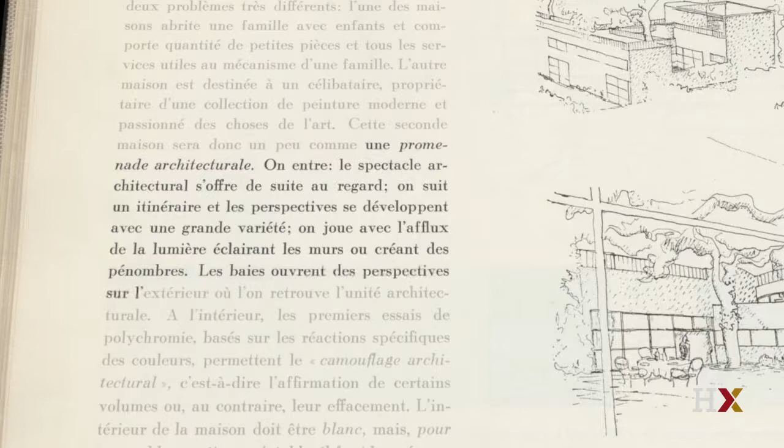You enter. The architectural spectacle at once offers itself to the eye. You follow an itinerary, and the perspectives develop with great variety, developing a play of light on the walls or making pools of shadow. Large windows open up views of the exterior, where the architectural unity is reasserted. Here, reborn for our modern eye, are historic architectural discoveries: the pilotis, the long windows, the roof garden, the glass facade.

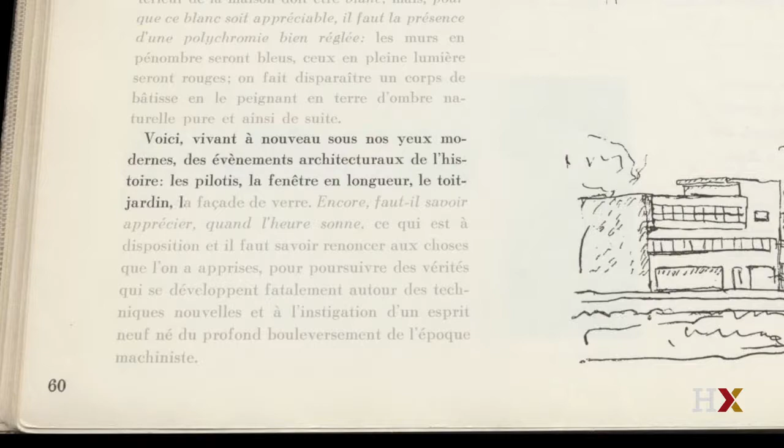Le Corbusier is describing the Villa Savoye at Poissy. While at the Villa La Roche, the spatial articulations of the interior were conceived in relation to an exterior that was still itself plastic and still could move around and be varied. Now at the Villa Savoye, the villa has become a total object through which the will of the epoch could be affirmed.

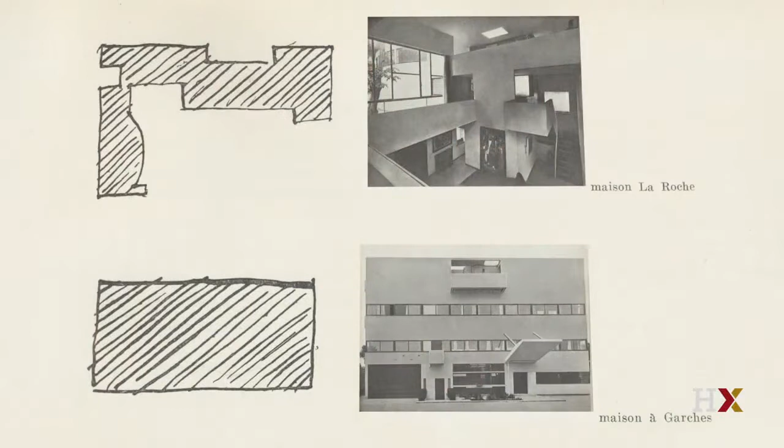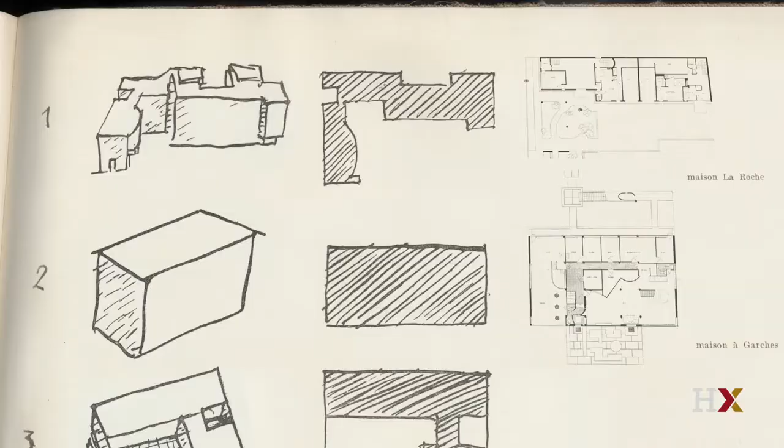The signs of purist composition that we saw in the prospects of frontality at La Roche and through the kind of energetic swirling at Garches here take on a more material consistency. At the same time, the prismatic envelope of Garches is reasserted to contain the equally variability of surfaces at La Roche. The architectural solutions of this elementary ribbon window of the enclosed terrace become a kind of insistence of this total object.

And at the same time, while we have this kind of functional minimalism of the interior, almost like railway sleeping cars, like ship cabins, like airplane cockpits, at the same time, there is an architectural solution that shows its real concern to be the relation of people to these new conditions.

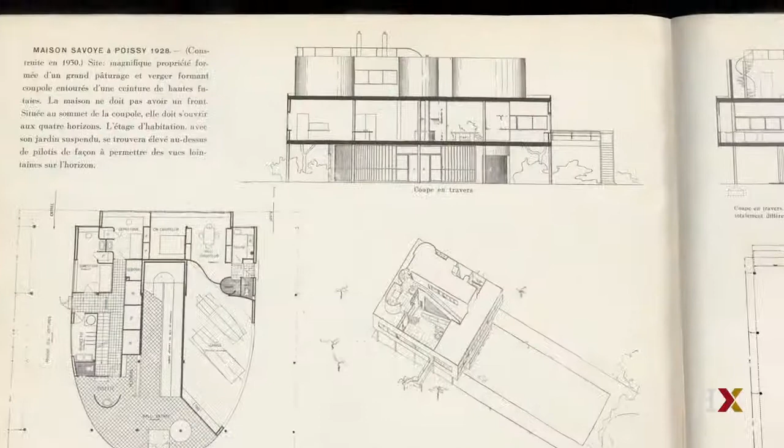The Villa Savoye is the epitome of the functional stratification of the section, of raising the pilotis, freeing the ground plane for movement, for transportation, for recreation, for vegetation. The house above is completely ordered and controlled, while the earth below is free and available for collective occupation, for collective use. And now, for the first time at the Villa Savoye, is a coupling of objets types, of which the Villa Savoye is only one.

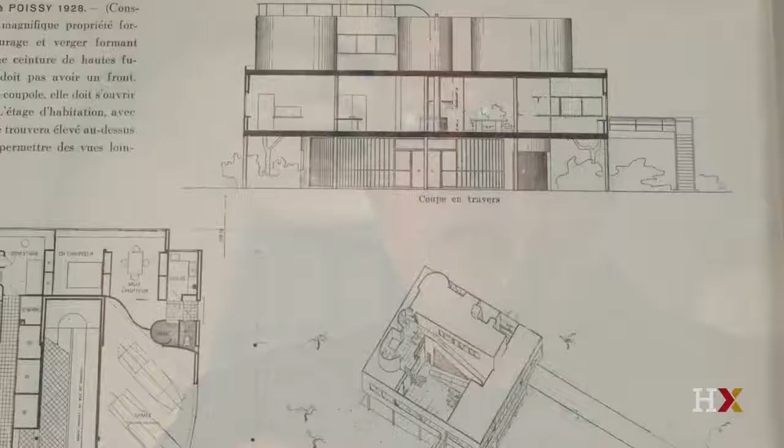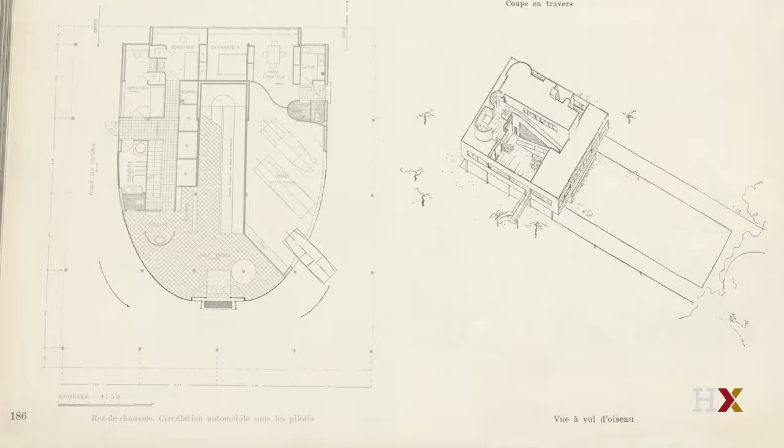For example, the automobile, itself a paradigm of the objet type, now comes into the site and moves under the building through the pilotis to interact spatially and functionally with the house itself. At the lower level, at the entrance level, the curved surface of the industrialized glass, which defines the volume of the entry hall, is itself determined by the turning radius of the automobile. Here, two object types come together and interact.

As you penetrate that glass wall and enter the entry hall, you see first, on the one side, a ramp that leads you up to the piano nobile, up to the main floor. Adjacent to the ramp is a sink assembled together with one of the pilotis, a very large industrial lamp, and a table attached to the pilotis. There's a kind of assemblage of objet type.

The sink itself is a mass-produced, highly refined, functional vessel for cleansing that stands almost like it's one of the objet type of his purist paintings. And the sink is juxtaposed, like in an assemblage, with this industrial lamp, which at first seems out of scale. It doesn't seem domestic at first, but it kind of gets domesticated in its assemblage by its interaction with the small table, with the pilotis, and with the sink.

But the combination of sink and ramp, as unusual as that is, it's not just two industrial types coming together. The place that you find the combination of sink and ramp is at the entry to a religious building, like a mosque or a synagogue or a church, where you first cleanse yourself and then enter slowly and ascend to a sacred space. The juxtaposition of these various object types creates a kind of metonymic relationship or an assemblage that makes connectivities that extend the domain of the house itself out into the industrial world.

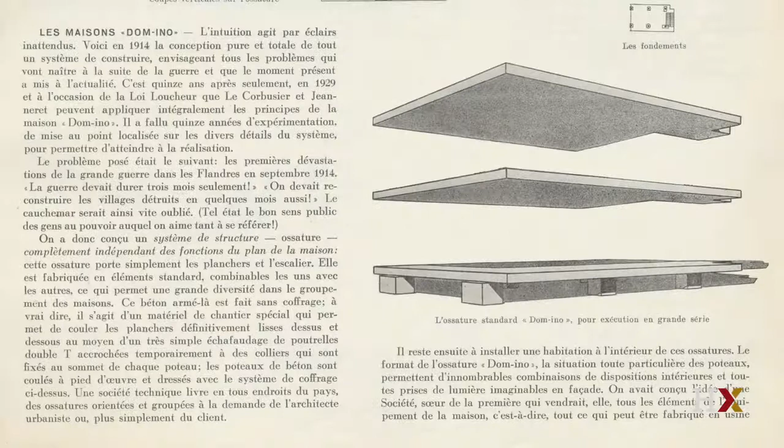The architectural promenade begins at the moment of stasis where the sink and the ramp have come together at the entry. Remember, the name architectural promenade is the name Le Corbusier gave to this itinerary of movement, rotation, and frontality through a building. In the case of the Savoye, the ramp becomes the instrument of that architectural promenade, and it operates in two ways. First of all, it operates as a path or as a space, a vertical space that cuts through the horizontal slabs. In the Dom-ino system, the horizontal slabs are determinate, and you move through those through a stairway or other circulations.

But the ramp cuts through those horizontal slabs and establishes a vertical slice of space that unites the slabs in a different way than the stair. Now, it is the case that even at the Villa Savoye, there's also a stair that provides a parallel but different kind of vertical circulation through the horizontal slabs.

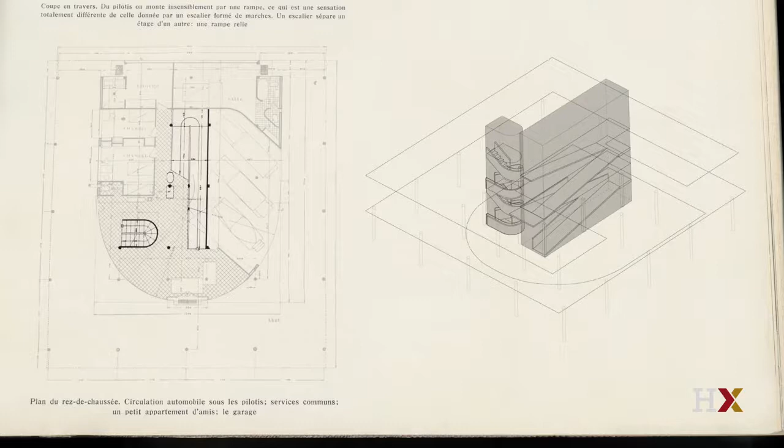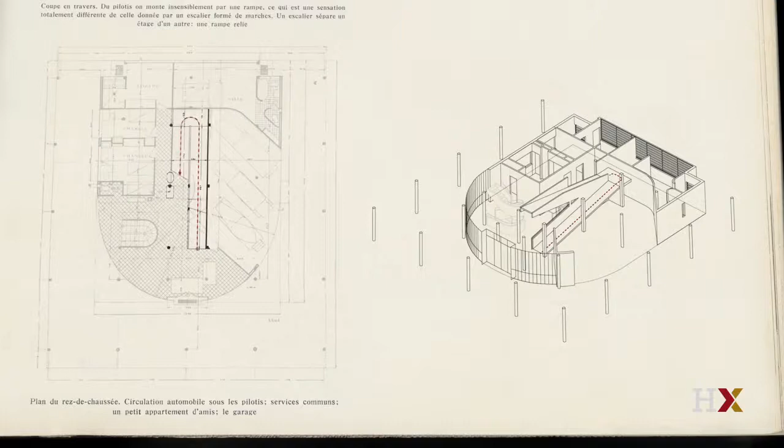And that combination of ramp and stair, they're actually very, very close to one another, and they connect with each other as you move through. That's also an important apparatus of the architectural promenade. So as you get on the ramp and go through and then turn around and come back still inside the house, but at the top of the second part of the ramp, you reach a moment where the stair has also come up and made a landing. So the ramp and the stair connect at that point.

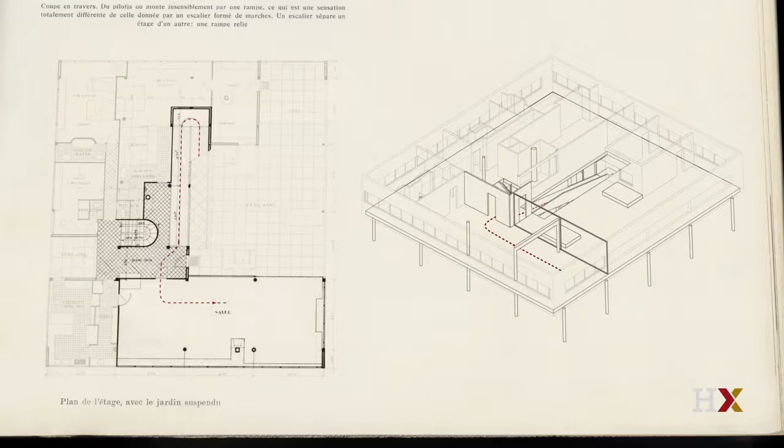At that landing, you have a choice. Either you go into the main living space of the house, or you move through the glass curtain wall outside into a very large terrace. That living space and the terrace interact in a very porous and transparent way. There's almost no distinction between the space of the living room and the space of the terrace. And indeed, in good weather, you could slide the glass doors open and it would become the same space.

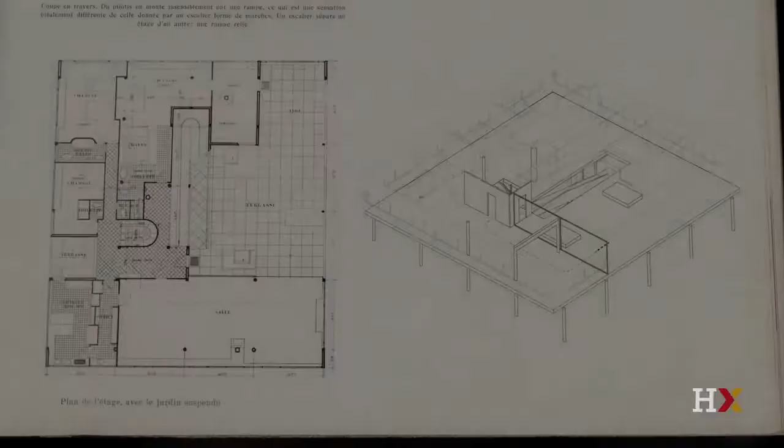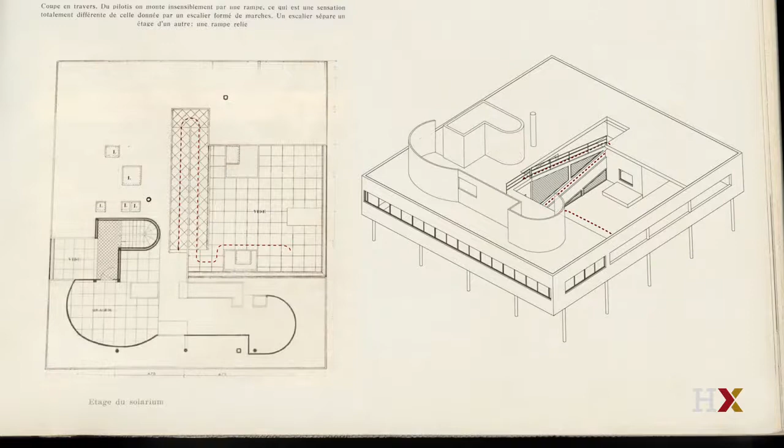The ramp then moves from an interior ramp into an exterior ramp that looks out onto the terrace. It again loops back on itself one more time, and you get to the top of the ramp, which is at the highest point of a second roof terrace, where Le Corbusier put a warped kind of curvilinear surface punctured by a single aperture that frames a view out into the distant fields and woods beyond.

So you've moved through an environment of industrialized glass, of industrialized lamps, of automobiles, into a more refined space, but still a kind of minimalist space of white walls, out onto a terrace, and then moving up into an area that you get glimpses now of the natural landscape, and then finally to the final moment of pause at this aperture where the landscape opens up.

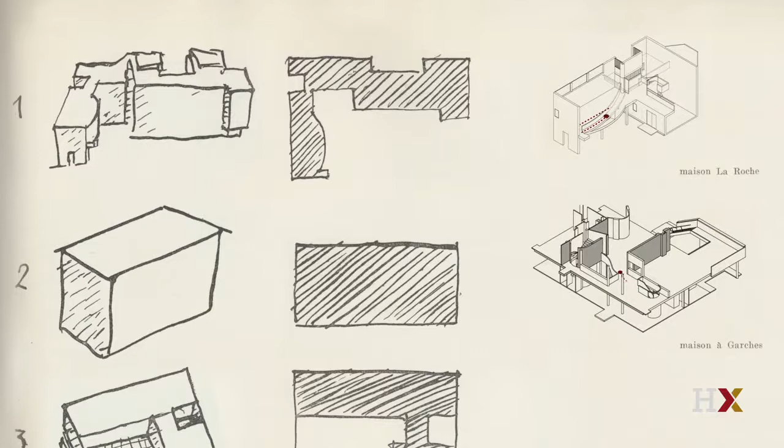In Villa La Roche and Villa Garches, there is this itinerary of rotation and frontality. There, the rotation is initiated by the surfaces of the walls themselves, by balconies puncturing through the walls, by apertures in the walls, by a curvilinear surface that comes and confronts us and makes a kind of pressure on the space. So the wall's surfaces control that or apply that rotation.

In the Villa Savoye, the ramp becomes the armature that more immediately and strictly controls that rotation. But it still opens up variability. Now it's not just the variability of the walking through the space, but it's a variability of vision that is constantly framed by the interaction of the ramp as an armature with the vertical walls and apertures as framing devices.

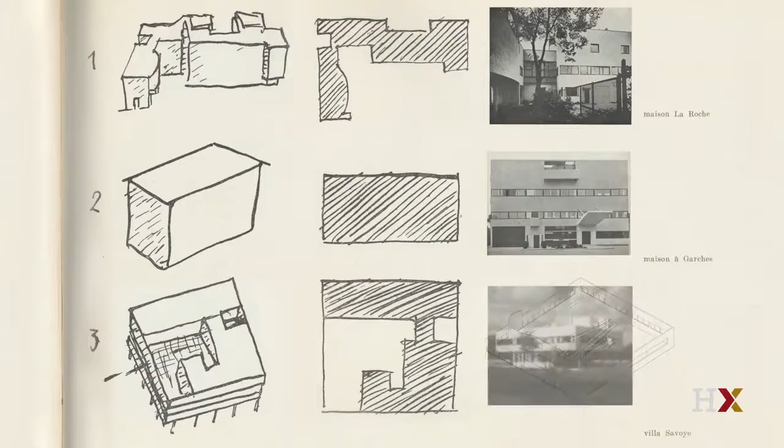And as you move through the house, moments not so much strictly frontal, but now framed in a more variable way. Moments are framed and pauses are caused because of the ramp itself and its interaction with other parts of the house. The ramp is the primary device that Le Corbusier uses to connect different parts of the house, setting up these interactions with different parts of the house.

The ramp diagrams potentials for occupation, but the ramp is also a device for connecting with conditions outside the house, what Corbusier would consider the eternal goods like access to the earth, access to the sky, open air for physical health. All these are made possible by what he called a machine for living, a machine, this object type, the house itself, that diagrams potentials for occupation.

The diagram, which is the house, constructs a world, but it's not just an immediate world. It also is a world yet to come. The machine for living constructs a real world that is yet to come, a new type of reality, a reality that will find its ultimate fulfillment in a future.

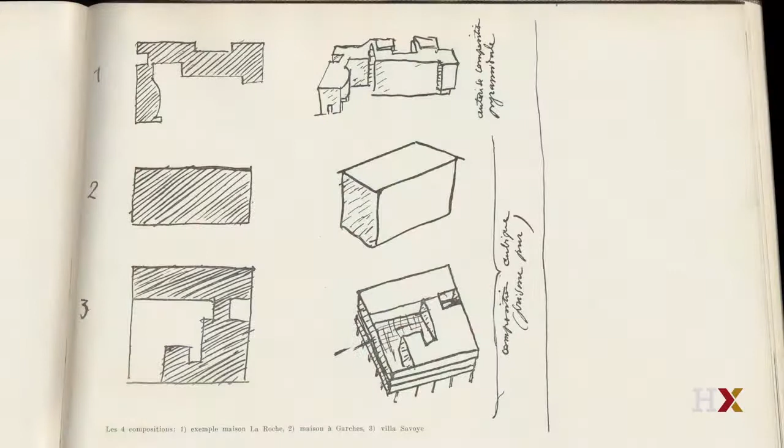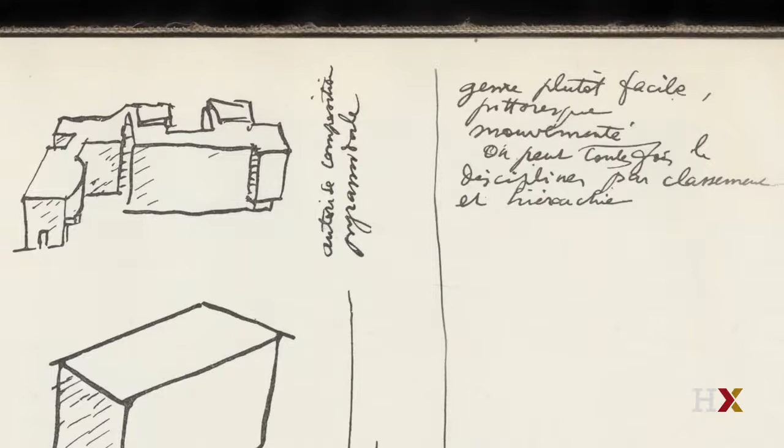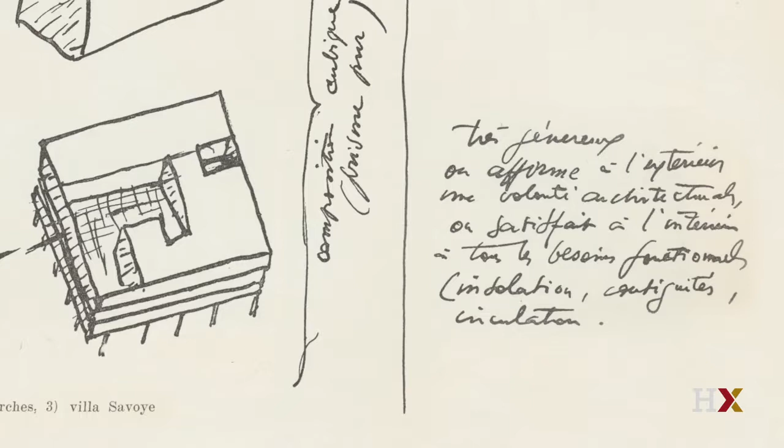In 1930, Le Corbusier pondered over the houses he had built over the previous decade. And he singled out what he called compositions, which are the different ways that the houses had responded to the initial Dom-ino diagram. He contrasted what he called the somewhat facile, picturesque, and hectic genre of the Villa La Roche to the very difficult design of the prism of Garches, which then led, he said, to the spiritual satisfaction which came at Villa Savoye, the very easy, practical, combinable type, which was the synthesis of the genre that had begun with the Dom-ino. It was the machine for living in the new world.